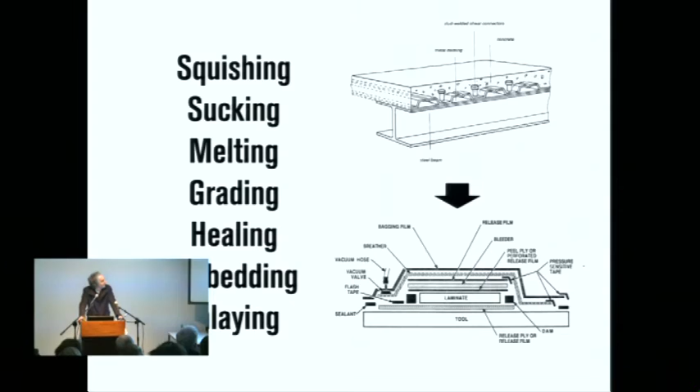Squishing is not a word you can use with steel and concrete. You can squish polymers, you can squish biomaterials and composites. So sucking, melting, grading, healing, embedding, inlaying.

I don't say architecture, by the way, because they're hardly ever used currently, and a lot of the composite construction we're talking about today, as I mentioned in the last review, is not state-of-the-art yet, but it's in the pipeline, and I think it will be in the next few years, at least in terms of building cladding and other issues.

That's a fact, and it's quite exciting to think about eliminating the concept of assembly altogether, where suddenly things are made with their component parts in a single pass, or maybe two passes, but very exciting stuff going on with multi-materiality right now.

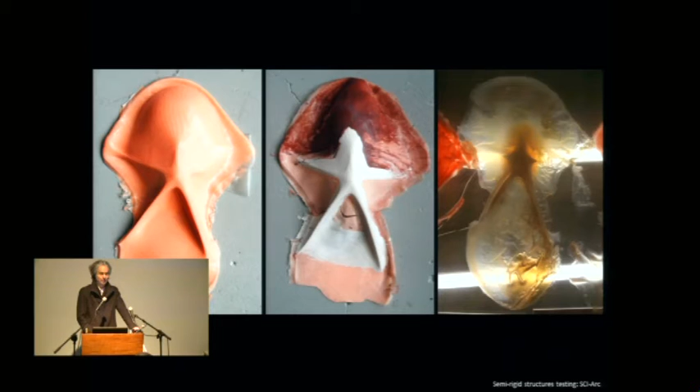This is another project from a seminar last semester at SCI-Arc. One of my students in my Squished Assemblies seminar, where we began to figure out what would it be like when we start to press and embed objects into surfaces in place of fixtures.

I'm really interested in eliminating all kinds of metallic hardware also. In fact, I have a kind of allergy against things that are metal and fixtures these days, so I'm trying to figure out how we can deal with composite construction, but also with all the other things that architects need to deal with, like lighting. In this case, this is a proposal for thin film solar, or other kinds of systems that might start to get embedded in an inlay, and then fused on top with a piece of acrylic that has its own kind of metaseam around it.

So this is Batwing, a project from many years ago, but I want to show a couple of these prototypes because I know you guys are working on this, and I'm not sure if you're familiar with them. This is from 5 years ago, and it was a first attempt to deal with surfaces beginning to delaminate. In this case, what happens when a surface can be not just a single surface, number one. Number two, what happens when it begins to delaminate?

You can start to get some structural rigidity, and also you get cavities. The surface starts to become volume, and you can use that volume in order to move air and fluids and things like that through an assembly.

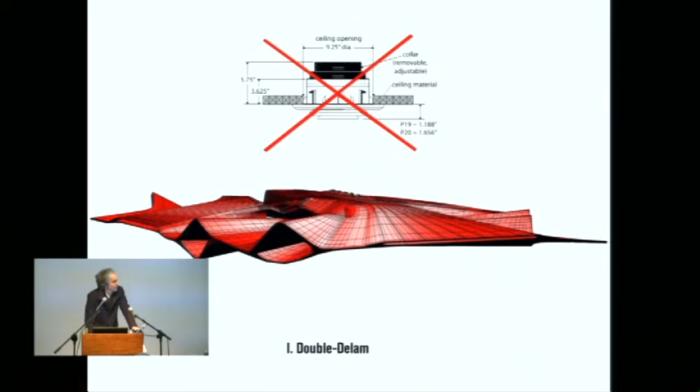So this is a kind of a prototype for a ceiling where you can get rid of the air diffuser, and basically, on the double delam, you can basically replace fan coil unit technology with a surface that does some work.

So you basically have some squished microcapillaries which are heating and cooling, so all you have to do is deliver air, and then these are filled with water, which is a great way to deliver heat and cool to rooms, and then you can run the air across it. So this is one of the earliest Squish projects, and here's a prototype of that.

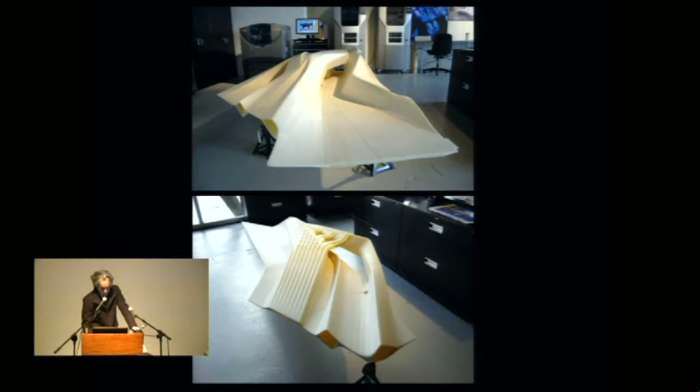You'll notice also, if I had my pointer, you'll notice some metaseams beginning to get formulated there, some seams on the prototype which don't actually have anything to do with components in that case, which are there purely at the architect's discretion. Another one, again, these are 4 years old now, but I thought it would be fun to show them.

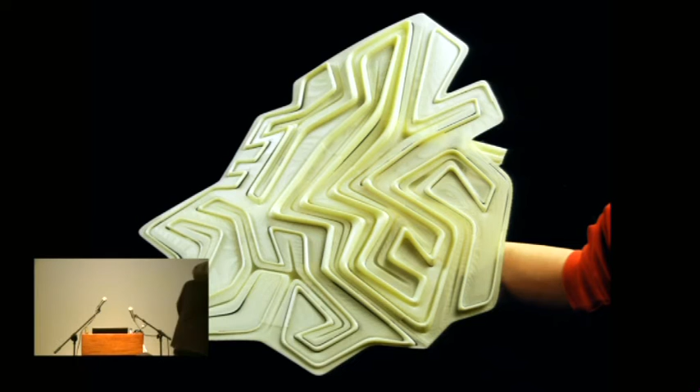One thing about that is that I'm not giving up on the idea that the structure can be maybe sideways to that, and that maybe the top chord is running the algae back to a central point, and the bottom chord is running the water, but that the structure may very well need to have a different kind of direction or language than the systems at the top.

Another one I'm really interested in, having dug it up, is called thermostrut. It deals with aperture, pleating, and most importantly, the embedment of a solar thermal system, like you'd find on a roof warming water for a swimming pool—those black coils.

So this is our version of that, where you begin to create figuration with these coils. I'd call this the earliest tattoo project from the office, where there's no functional reason the coils have to be all parallel, so it can become figural.

At the end of the day, I almost care more about the wholeness of this piece—through color, through the black line work, through the pleating, the unification of all these things—than I do about its engineering efficiency.

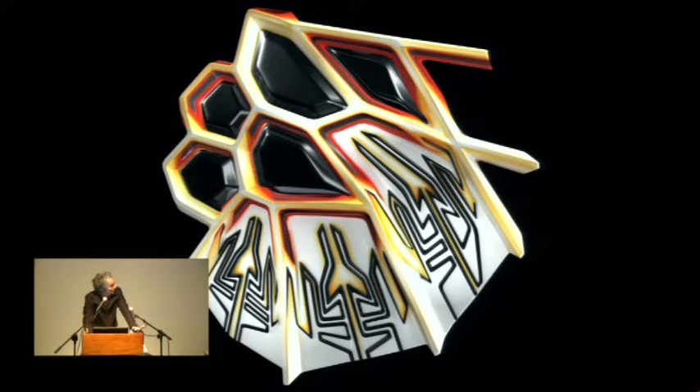So there's a model of it, things actually being pressed in. This is a multi-material print from a couple of years ago.

Another old project I showed for the concept of metaseams—notice these panels are way too big. This is a metal structure, and when this was done in 2008 there wasn't much discussion about composites yet, and I was even unsure myself. It was an intuitive move to break down these panels, create toroidal structural surfaces in the middle, and break them down in a radically different way, with very small panels and very large panels.

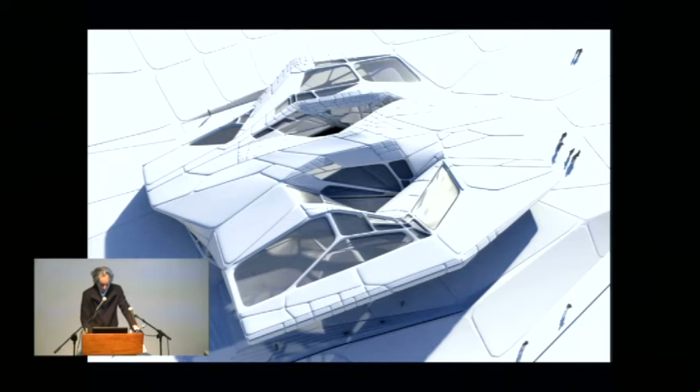Of course, when we imagine this through composite construction, those lines may or may not be joints, depending on how the project is delivered.

I want to show a project I did with my students, since I had discussions with Patrick about it recently. The program is called Materials Lab—we started it a few years ago at SCI-Arc. It involves the school supporting construction of an object using advanced materials, or whatever materials someone wants to use.

In this case we kicked it off with heterogeneous composite construction, which basically means, again, the surfboard idea—how composites can be more than a single layer over foam doing its business for performance and stiffening, and how you can have gradient differences in thickness to change the performance of composites.

So we decided to do this with tape, dyed orange tape. It was orange only because that was the only dye that would take to the glass fiber—I don't know why. It's shoe dye; we wanted black.

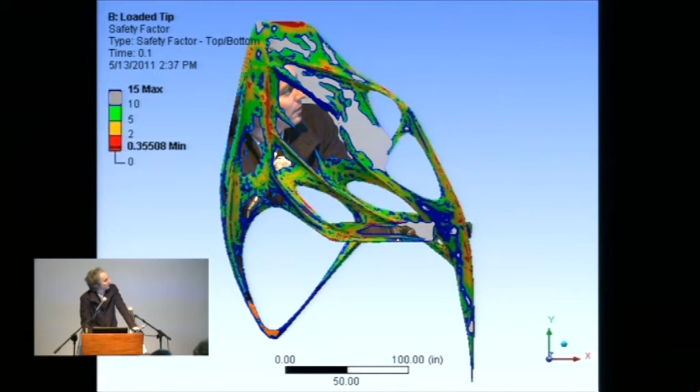So that was a quick study of it, a prototype. We worked with Buro Happold on this, doing surface structural analysis, which is still new to a lot of architectural engineers, as people in practice know.

We talk about surface structural analysis a lot in academia, but the reality is it's the aerospace and naval engineers who are really good at surface analysis, while architectural engineers are usually still stuck with vectors. So this was fun for Happold too, getting up to speed in ANSYS to analyze the structure for cantilever.

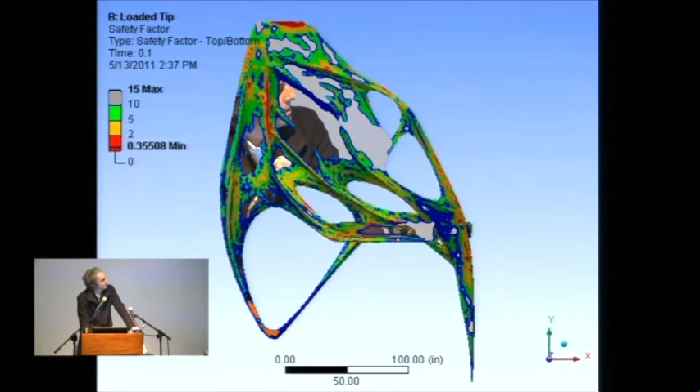We did a series of steps—I didn't want to show them all tonight—to get to the point where we could add the tape. The pleating was something that evolved over time, but we decided to use the tape to deal with some of the stress high points.

This is actually from an email I sent to Happold when we were starting to talk about how to apply the tape. I wanted it to be kind of patchy and discontinuous, not wrapping the entire thing. So this is the piece.

Wherever you see orange, imagine there are at least 2 layers of weave on the piece, up to 4 or 5. The overall thickness of the piece is very thin, like 1/16 of an inch, and it's just fiberglass mat. It's completely underdimensioned, so if you put this up without the orange tape, it would fail—which is exactly the concept. We need to add the tape locally wherever needed and build it up, particularly at the supports, so that it functions.

Now, I want to say this is probably not the most optimal solution, and that's something I'm a bit against—the expression of optimum and optimal engineering solutions. So any trained eye will look at this and see where it's not optimal and where other things are going on here.

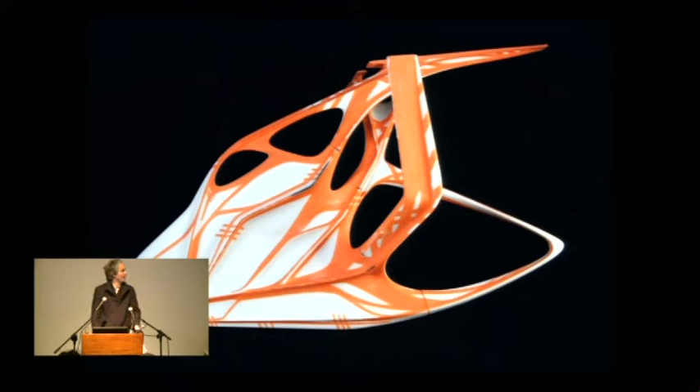At that moment is when I started calling it structural tattoos. Because what is a structural tattoo? It's an inexact term, and I like it very much. There are obviously things that are not structural, and I'm totally good with that.

There it is when you turn off the rest of the skin, the taping. I guess I missed some slides—what happened? Oh, that's out of place.

All right, whatever. So one of the things about composites that we saw today is how do you break it up? It's completely different, depending on whether you are building it in situ.

In this case, we built it in chunks. And how do you attach chunks together? We wanted, almost in a maniacal way, to have no hardware in this piece, only glue, which created a lot of problems. So we had to do the components.

Why? Because we had to get them through the doors of the school. It had nothing to do with delivery, but we had to get them through the doors because we were working with a contractor outside of the school.

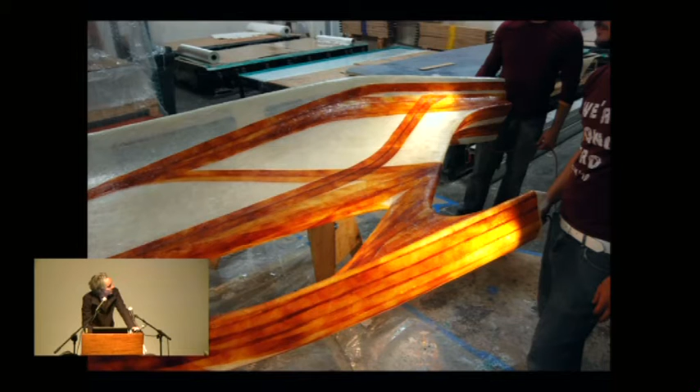So we built these things in pieces which already had the orange tape on them, which is interesting because there's not really much continuity between the pieces—which doesn't really matter in terms of composites. This isn't like a piece of rebar that has to stick out at the end and continue into the next piece of concrete. I thought that was very interesting.

I also like very much that we're looking again at structure which is translucent or transparent, which changes things. It's a game changer.

Here's us making some of the forms, and removing some of the molding, and then very low-tech again with projections, figuring out where we're going to put the tape on this thing in the factory using the 3D print we had and our black duct tape.

And then here's the piece standing in the space. It's connected back to the wall at a couple of points, and it cantilevers quite far out.

There's the final thing, and that's Andreas Froech from Machineous, who helped us build this project. It's quite resilient—it bobs up and down, but it doesn't really go anywhere.

Another thing I like about it that I didn't realize—we discovered after talking about it that if it fails, it doesn't crack or break, but folds like textile, like a stiffened jacket. So even if it fails, it's not going to really kill anybody. You'll see it coming, it'll fold down.

But anyway, we got a bunch of people up there. So that's that project.

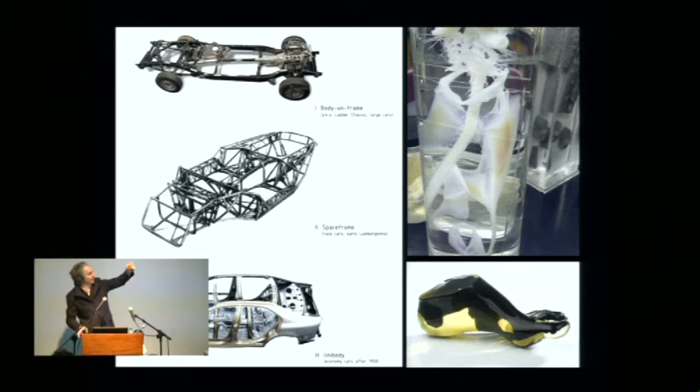And sharks also have these strange growths in there. The spine isn't so interesting, but those things on the side have increased material thickness related to increased opacity, and decreased material thickness related to decreased capacity and opacity. Very interesting in the shark skeleton. The implication there is also the multi-materiality of 3D printing, for which I find a car to be a really great scale.

That's right around the corner, that kind of stuff. So here's a sketch of what that might be when you begin to determine, when you begin to put one material inside of another. Imagine this is a kind of silicone matrix within which you have a more rigid material only in areas where it's needed. One of the nice things about working with all polymers instead of mineral materials is you can begin to pull up almost like slabs of skin. You can pull up or wrench or wrinkle the skin on the car, and you don't have hinges or anything like that — it's all one giant living hinge. So here's when you pull out some of the internal more rigid areas from the inside.

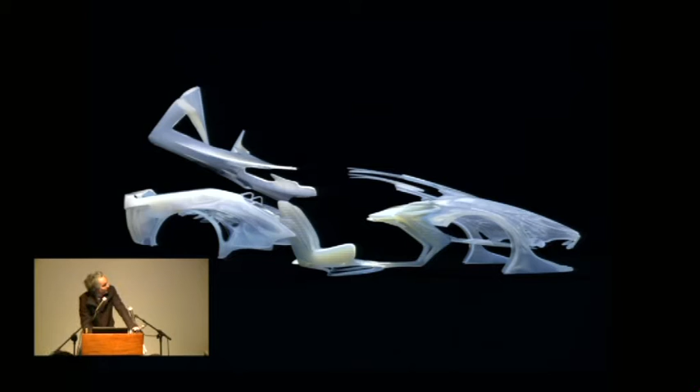And I love this idea of stuffing things inside of things, frankly, for the effect of being able to have depth in the surface. In this case, we're starting to think of ways of having biological glow, or maybe an algae bioreactor in the hood or whatever. So we're starting to stuff objects into this thing and then dip it all in silicone, more or less.

So you've got some actuators in there where we're kind of saying, how would we trigger the living hinge on this thing? Again, this is not an overall solution for a car by any means — I'm not an expert at drivetrains, but this is sort of an architect looking at the things an architect might be able to contribute on, which are issues of surface, enclosure, skin, embedding, aperture, those kinds of issues.

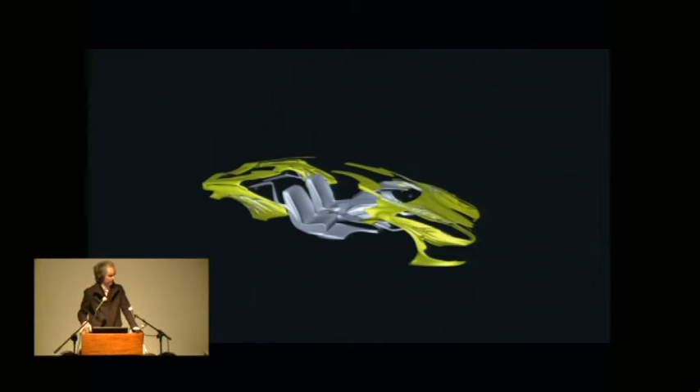One nice thing about 3D printing is, if you got a flat tire, you could just 3D print the entire thing out of more rigid rims and into rubber without having to have tires or anything like that. And one other thing too — this is just a concept, but it's interesting to think of how you might be able to roll up a car like a sleeping bag and pack it for transport from wherever it's manufactured, rather than having it in those strange containers down at port terminals.

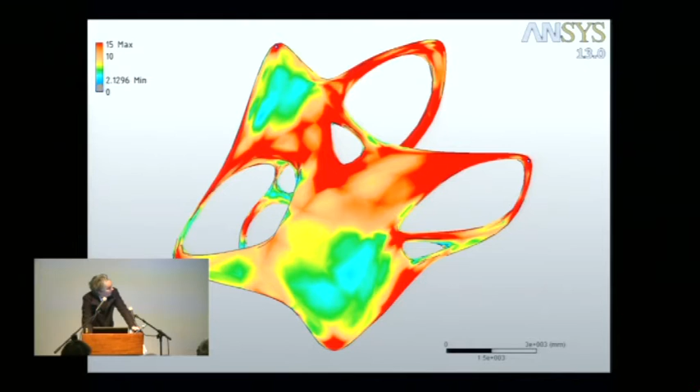We started this project, gave it a form, and analyzed it in ANSYS, and we decided that the areas under highest stress were going to need to stay as composite structure — so those are going to be fiberglass. The other areas were a little more open for discussion as to what they were going to be. We figured that the areas under least stress could become acrylic areas that are basically snap-in kinds of structures.

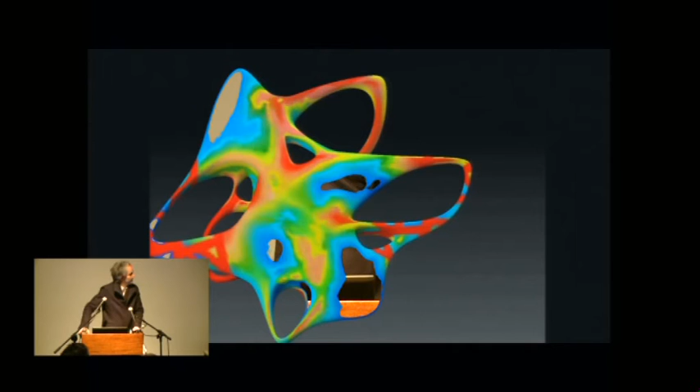Now, the project was really important for me and for the office because we began to misbehave a little bit with the engineering model here, where first of all, we brought it into ZBrush, which is probably a no-no, to take a structural map into a painting program. We began to look at it aesthetically and try to leave the areas that needed to be a certain way in terms of engineering, but then completely interrogate it in terms of the aesthetics and change it where we thought we could, because we wanted more loopiness, more leopardiness, and those kinds of qualities.

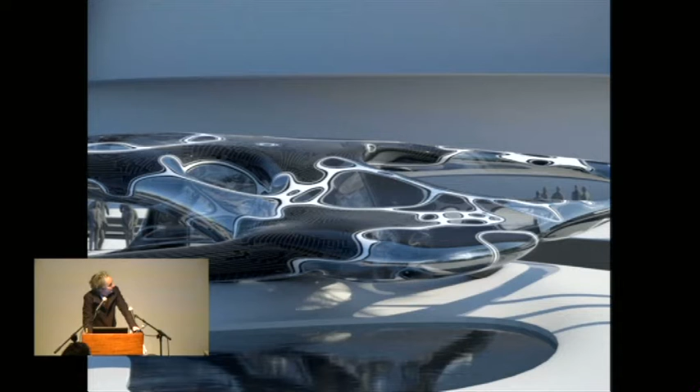So these are just some of the studies that we did on this piece. So there's the final thing. You can see some inlay of 3M thin film tape in the black areas. The white is just white on the outside. On the inside, it's electroluminescent on the acrylic.

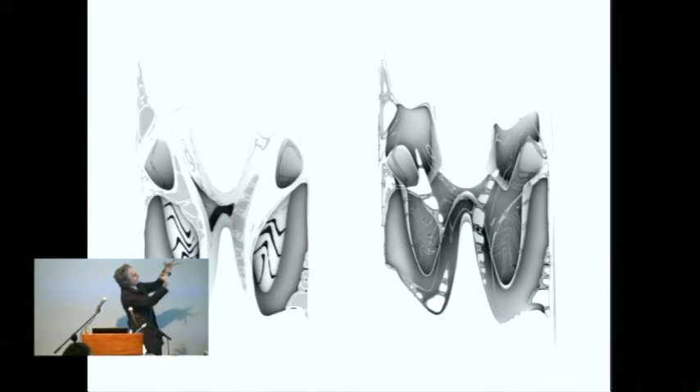Another prototype that we did after that, when I was just starting to get sick of things that are ultra thin—it's what happens when you begin to delaminate the surfaces again and create real objects inside of objects. So we took a two-surface piece, top surface, bottom surface, and then began to have huge involutions in the bottom surface so that we would actually have objects behind aquarium-type apertures.

And we began to really push the envelope of the paint so that we would have the black polka-dotted or spotted pattern on the outside as a solar inlay, and then on the inside we might have electroluminescent inlays which are more like tiger stripes. So we're going from cheetah to tiger here, and I like this piece just because it has volume to it. It's not super thin, but it's based on super thin tech.

So those are some of the prototypes and thinking, and the work over the years since I started my office, about six years ago now.

We used to do a lot of work on the issue of surface to line, which basically means teasing things out of surfaces—like taking a wire and teasing things out, particularly pleats out of surfaces, which was really productive and interesting. I think, though, that the work more recently has been more about surface to volume, which is the same basic idea, where you're trying to create transitions or transformations between things which are ultra flat and things which are more volumetric.

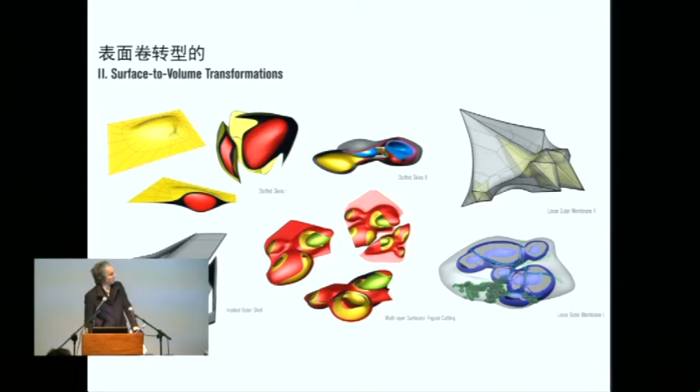And I'm finding that that's more useful in terms of building design and organization. The other one, the former, is maybe more useful in terms of articulation of surfaces. So surface to volume has been a big focus.

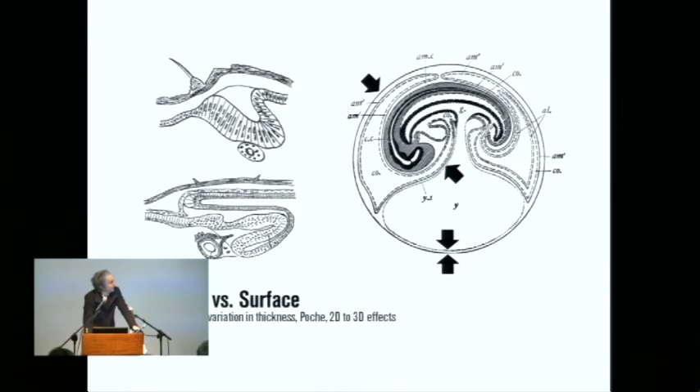I always like skin, the idea of skin over surface. Surface is very abstract to me, but skin I like very much because it's constantly changing in dimension and material, and I think it's a great model for thinking about architectural skins. So I like to think about that and objects inside of objects.

So that's the first one, push the wire through the rubber sheet. This is put the figure in the sack model—that's what I've been calling it.

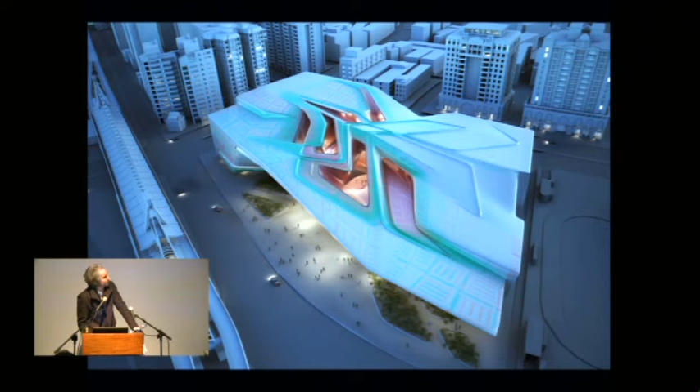I guess one of the important things about it was that it would go from razor thin on the edge to volumetric, and in this case, it also has cavities in the inside. The cavities are a kind of concourse space that connects several theaters together, and are really very urban. Again, it's beginning to break down the hard edge of the building and beginning to draw out the space between the building edge and the interior.

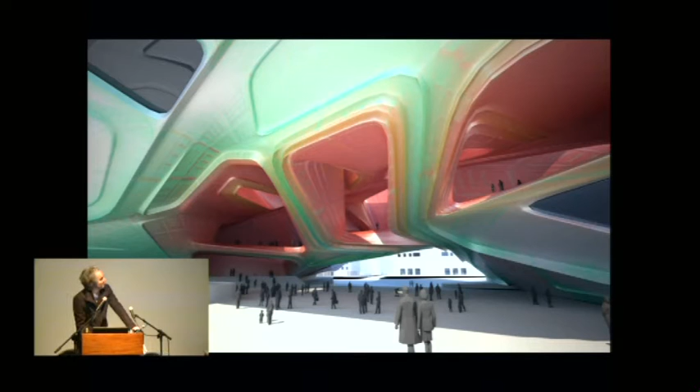This is a very highly articulated drawing out of that, where you begin to see pleats inferring some kind of stiffening of composite structure. You notice there are not conventional subdivisions on this on purpose. There is, however, if you look closely, some additional patterning on the left, almost Aztec-like, which is also one of the sources of the tattoos we've been working on recently, a substitute for conventional subdivision.

Project in Puerto Rico. Don't know what is going on with this, but this is something that my friends Hernan and Marcelo, the three of us, are working on to make happen in Puerto Rico, and we've made a lot of trips down there.

So this is a real project, and the proposal is from the Pontifical Catholic University of Puerto Rico to build dorms. They need 2,000 beds, so we're building some high-rises down there. Of course, I actually find high-rise design to be incredibly difficult, so I appreciate people who took that on today.

So I went with something horizontal, of course. That makes no sense, but I really like this model, which I call the implied outer shell, where you have an internal figure or mass which has surfaces that pull off of that and begin to create a secondary enclosure or implied outer enclosure, which is not total.

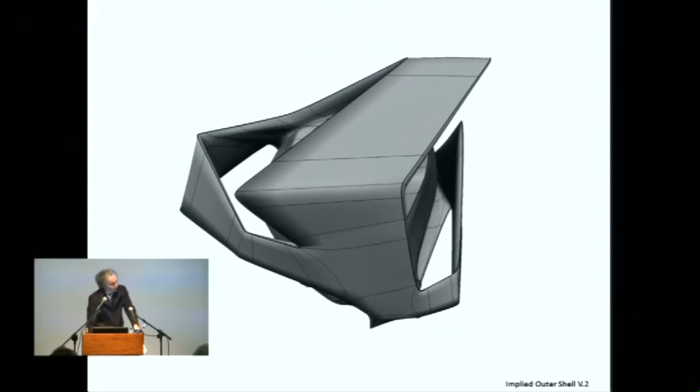And I wanted to use this to make the dorm. So here's the project. That was one angle. How do you begin to create something within something else in a tower type?

Almost impossible. The other thing I wanted to do was to separate the building from the ground, which is something I've also been doing intuitively for a few years, and I'm getting more excited about because it begins to objectify the piece where it's no longer a landscape project or a single surface project, but it's actually an object which is nestling into the ground.

Something I'm working on right now also is to begin to give the ground itself more character. But I like that very much, that it's kind of a no-no, like you don't do a horizontal organization for a vertical organization. You don't, let's say, burrow out underneath a tower, which should normally be a cantilevering beam out of the ground. But I think it has certain effects that work really well.

It also creates an interesting internal organization in one place where what you think is just a single surface on the left, this razor-sharp edge, actually opens up, delaminates, and there's space inside, so that becomes a shared public space that you can actually leap over on those bridges and inhabit that space and have a view out.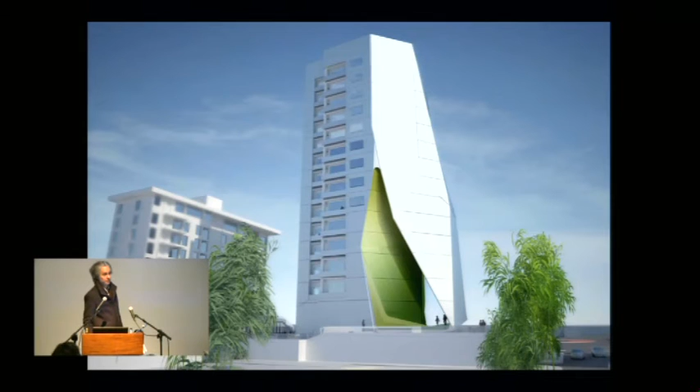So, and this is the back. This is rough and tough. This is a real project. If nothing else, if not for economy, this is for strategy, this image, if you know what I mean.

And this too. This is in Puerto Rico. This is where you build with concrete. Why hurricanes? Why longer-term history with building with concrete and a kind of feeling of comfort of building with concrete. So the red is the only steel area in the whole project, and those are just pipes. They're pretty straightforward.

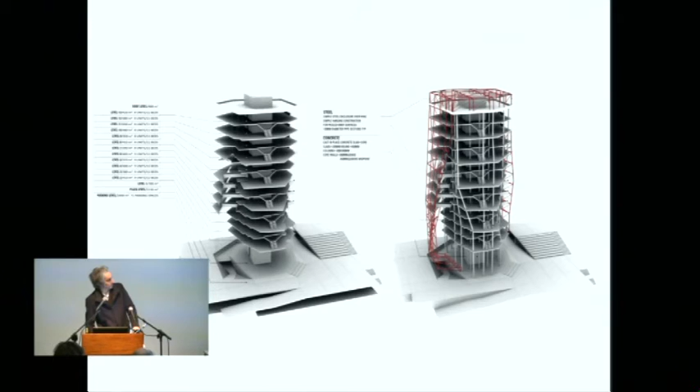So here's the piece. Punch windows, very difficult, hard call. I don't know how to solve it any better. There were probably 100 versions of how to do windows in a dorm, which you have to deal with. I found this to be the one that interrupted and hurt the massing the least. Surprisingly, there were a lot of other ones.

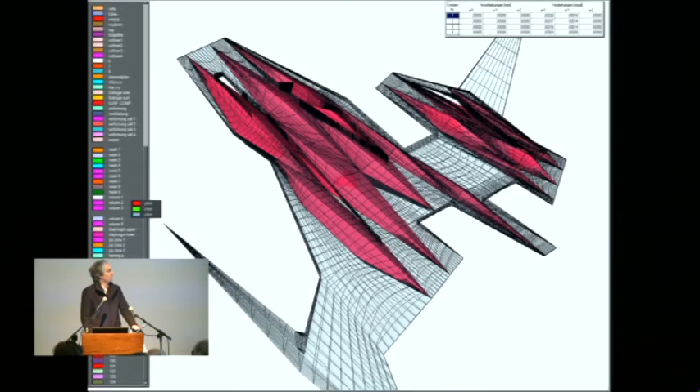Okay, older project, which you probably know. This is PS1, which is actually quite an old project now, 10 years old. But I brought it back because it is objects within objects. In this case, these are structural cells, which are kind of an arrangement or swarm of cells that are objects themselves, but have a loose outer skin around them to create shade. I'm realizing the more I think about it, this is a kind of early version of the squishing and also of the object within an object. So I wanted to show that.

So squished, as if vacuum formed, although made out of minerals, squished, and also the object, the structural members, not so interested in them structurally. Some of them are 50 feet long and they're doing a lot of work, but I'm way more interested in them as objects nested within a loose outer skin.

So here's the piece during the day, a complete opposite of the nested cell, which is quite nice too, so you read it as an object without its internal objects.

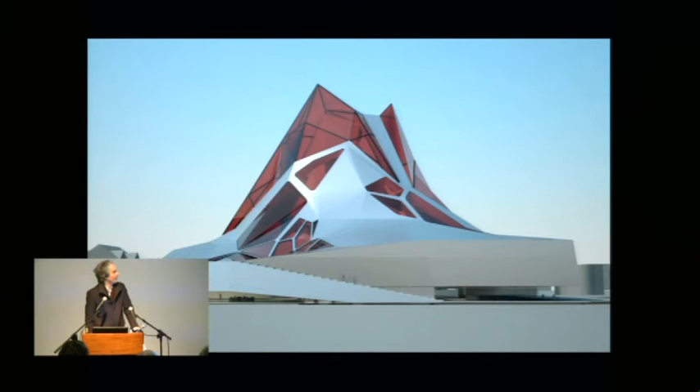So, another old one, brought it back. This is a competition that I did in '07 for the Prague National Library, and it's something that I'm finding, the more I think about it and begin to categorize some of my projects, is actually coming back. This is a National Archive and a library, and everyone knew about this competition at the time. It was won by Jan Kaplicky with a very similar scheme to this, actually, a kind of a mountain. One interesting thing about it is that the height limit was only 15 meters, which was this high. So it was one of those where you had to break the rules in order to make the final cut.

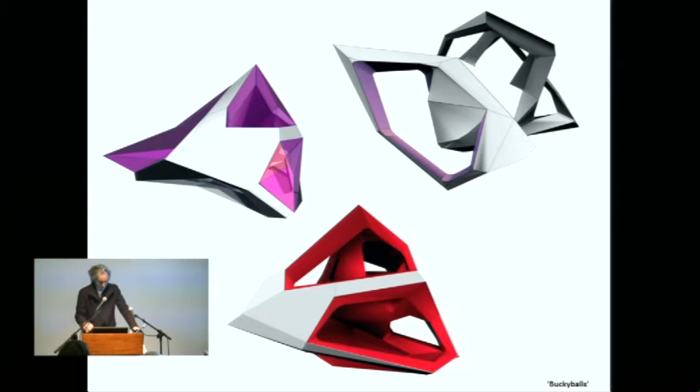And the reason why I'm showing it is because it's the beginning of what at the time I was calling these buckyballs. It was very informal, but the buckyball was basically an implied outer shell, where you have something on the inside and you have an outer shell which has huge apertures in it. And so I realized recently that that's actually part of this lineage of the Implied Outer Shell project.

So here you have the National Archive, accessible from almost nowhere, visible from everywhere, from the library at the bottom level, which is public, and then the reading rooms at the top, which are private, and then the thing is suspended above the ground. Again, you ask maybe why - they had flooding in Prague the years before that, they lost a huge part of their collection. It was actually required to have the books off the ground, so I thought I would make that the project.

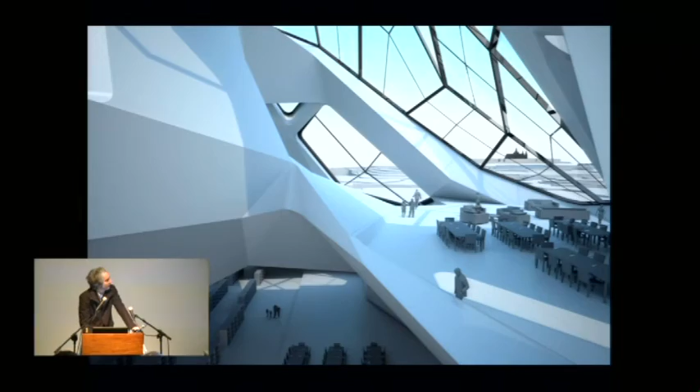And so there's a second skin around the entire thing, which creates a nice environmental and depth buffer around the object. So there's the organization of it, the view down onto the public space and out to the castle. And the plans.

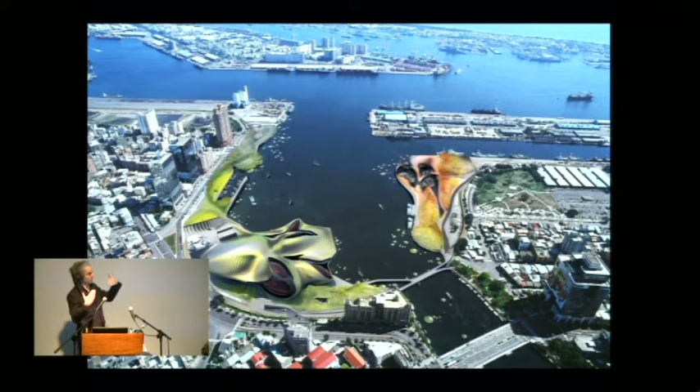So another older one, this is from 2010. Figures in a sack, objects in a sack. This is for the Kaohsiung pop music project, another big uninvited international competition. Really fun site, the entire waterfront of this old kind of port area of Kaohsiung. They wanted to turn it into a kind of multimedia music environment with indoor and outdoor amphitheater and those kinds of things. So I decided to make a multi-layer, multi-material sack, stuff it with theaters, and then begin to cut away at it with what we called glance cutting - basically complex surfaces that were not normal to the surface, but at angles, so that we begin to reveal the different layers and reveal the objects inside. So it would kind of hover between the mysterious quality of something in a sack and also revealing those objects inside. So there's this thing, some of the cutting and studies that we did, surface to volume, glance cutting.

And some patterning on there for thin film solar as well. You notice the patterning doesn't continue, it stops where you have the thin film. And here's the director's cut at the end - this is not the one we sent in, but this is the one everybody liked the most.

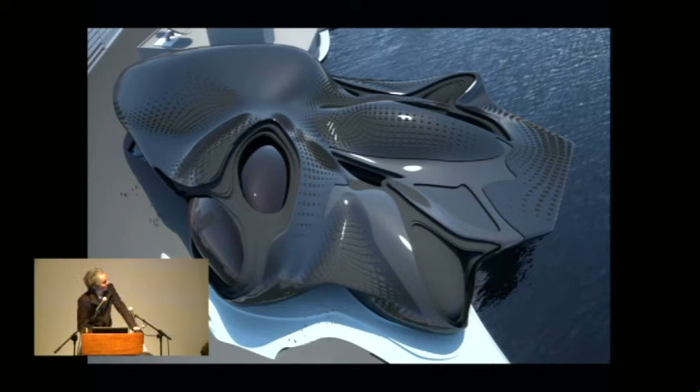Okay, so here's another project. This was actually for the Venice Biennale, so it wasn't really a competition. That's why it's not worked out.

But as a concept, we wanted to do it. This time, more mysteriousness, stranger figures, stronger edge figures inside of the sack, distinct fall-off conditions where you're beginning to understand what's inside, but then in other areas falling off into membrane. That was very important, and so we did some of these fun videos here.

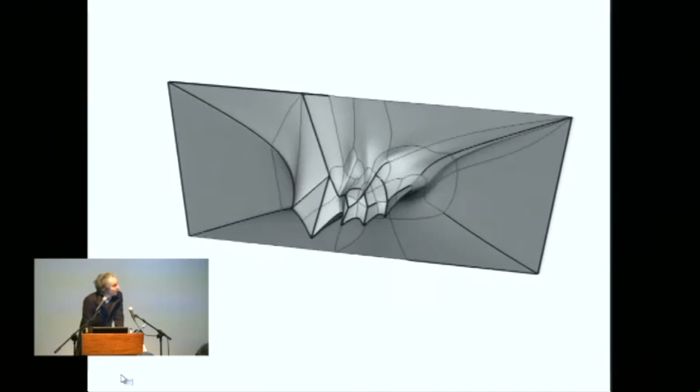Don't mistake this for a draping algorithm or an engineering solution, although it may have some of those qualities. The minute you stretch a membrane, of course, you've got a stronger and better performing membrane, but we love this little guy pushing through here. So, okay, let's keep going.

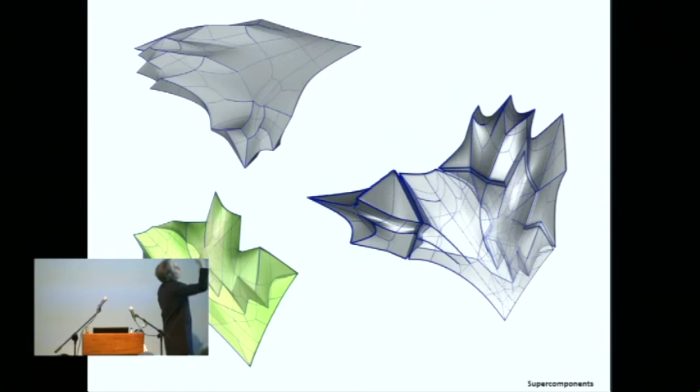So here's some of these figures in the sack. And then I think the more important thing on this project was that we wanted to get away from the uniform blobbiness of the thing on the top, although it's quite differentiated. We wanted to get away from that.

So we invented the idea of the supercomponent model. In this case, that meant putting a sack on there around the figures and then almost inflating a balloon inside, which we call the liner, which is the green thing. So you inflate it, you let it squish around and tuck in around the figures, and then you remove the outer sack as if it's a tool or a mold that you're using to get the liner.

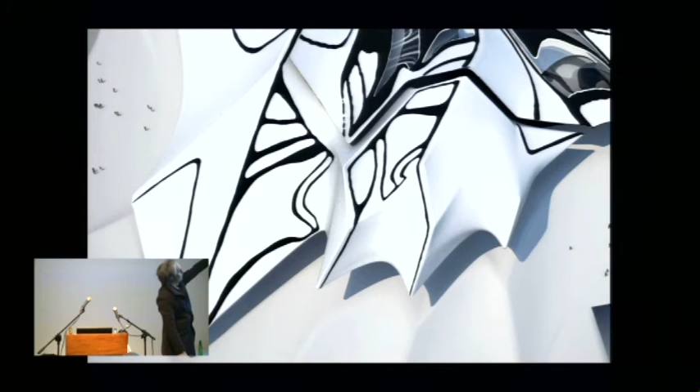What's the payoff of doing that? The payoff is that you can begin to get these joints. You get continuity between multiple massive components, which is then emphasized through the introduction of the tattoos, but they're separate objects. So you can imagine there's actually a space in between the supercomponents and the liner. So that was a nice discovery because we got away from just the uniform kind of topological thing there.

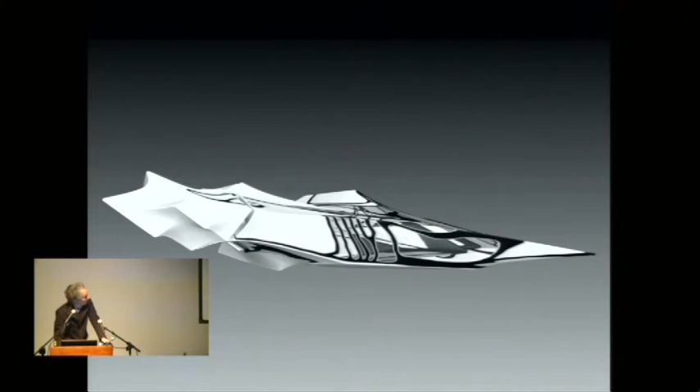So here's the side view. You can see the outer figures in some points actually pushing into and through, so you can see them through the front. So very undeveloped, but that's what we showed at the Biennale.

This project was for the Busan Opera House. I'm sure people in here did that one. That was a big one.

It was more recent. And in typical fashion, a kind of site that's not a site, a context that's not real—it's an artificial island, probably was a landfill. So we had one corner to work on, and we didn't know what the rest of the development was going to be. So we just thought we would kind of work on the spherical project there, and go vertical, but go spherical.

And again, we used the model of the implied outer shell. In this case, it was very useful because there's extreme weather here. The monsoons and the sun are very tough, it's very humid. So we really almost needed to create an in-between zone that they could use for some of the outdoor activities that they wanted to host, which would never have worked if we didn't do that.

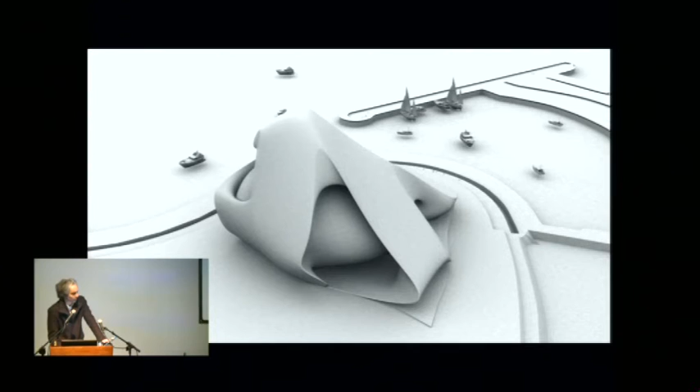So you see these kind of pieces of skin peeling off. So it creates an indoor-outdoor microclimate there.

The tattoos are maybe more aggressive in this project. We're just starting to come to terms with what these things are—I don't even know if we were calling them tattoos at the time. Where they're starting to have figuration, which is independent from the object. In other words, the drawing needs to be worked out in parallel to the object, to the massing. There isn't a complete one-to-one correspondence between formal features and the drawing features.

So there it is. Okay, so tattoos—I need to say something about those because you can't just say the word tattoo in an architectural lecture and not expand on that. So tattoos and the status of subdivisions.

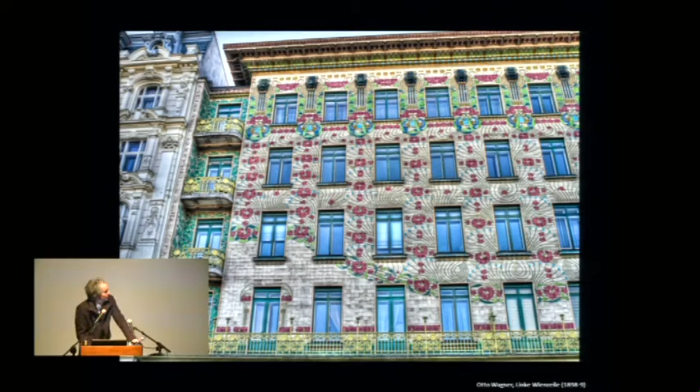I find that the window punch holes are very disturbing, and they don't seem to be affected at all by the tattoo layout. And also the size of the tiling relates to and indexes the kind of ceramic industry or concrete tile industry - I'm not really sure what the material is. So it's interesting as a kind of counterexample to what I'm talking about.

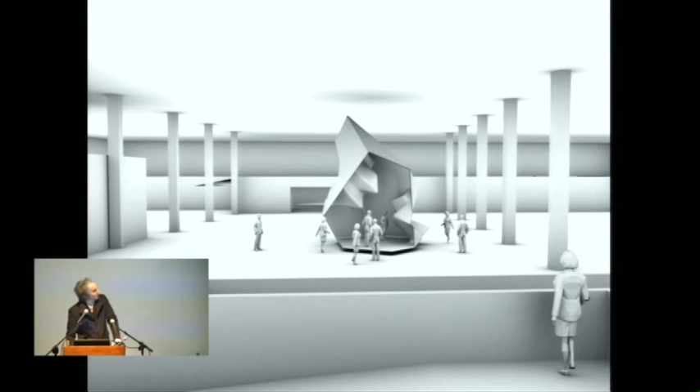But we decided to start with a crystal-like form and push some crystals in from the outside in order to create mass on the interior. So here's the base form of the piece, where you're getting something that appears to be incredibly massive or heavy, but it's actually razor-thin surface.

Here's the piece, very simple and crystalline on the outside, and on the inside kind of gooey and soft. And you can see there the poché is extremely razor thin on the edges and all the visible edges, so you read it as 2D thin surface, and then it becomes sort of lumpier and fatter in the internal areas.

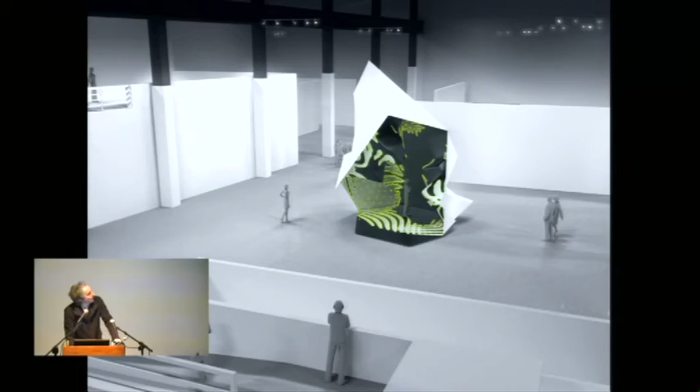So there are the tattoos relating to the moments of the most stretching pressure there in some fashion, but also going completely freestyle and freeform in other areas. So trying to highlight it, but also deviate from it.

This is one of the pattern studies for that, another one.

One of the interesting things about this piece is that it is actually composite, although it's one of those budgets where you kind of build it out of whatever you can get for the price. It ended up being composite because it makes the most sense.

And one part that I like about it very much is that what seemed to be excess or unrelated to underlying features or structure ended up being a way of friction fitting pieces together. So the tattoos themselves actually are reverse engineered back into joints where pieces begin to fit together with a limited amount of fasteners. So it's kind of stable almost just when you assemble it, like puzzle pieces.

And of course it had to be broken up to just be moved in a truck. This is a prefabricated piece.

This is a project for a graduation pavilion for SciArc, which was an internal competition that we did last summer. Again, this idea of pushing on something to get fall off conditions.

And here's the piece. The program was to build 1,200 seats that are in shade, for basically lectures and symposia and all kinds of things.

Patrick, I think you lectured there when it was a big empty pyramid with no cladding on it. And so the school wants to have something a little more permanent. So this is the project. I wanted to make a full enclosure on it that could be used for other functions.

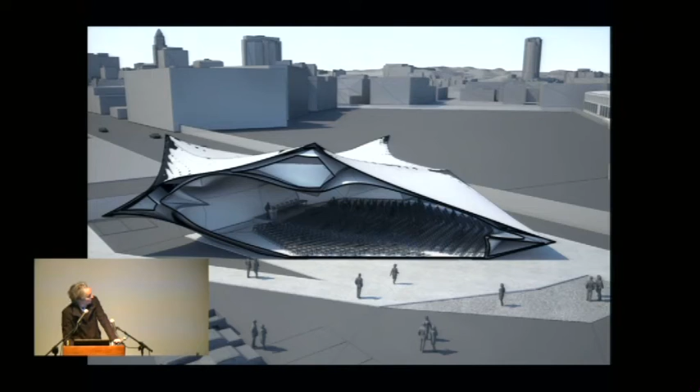But I guess the most important thing for a project like this, which was a realization project for almost no money, was the way of building it. So we called up some shrink wrapping people, because I thought that would be consequent, materially speaking, to try to use shrink wrap on a shrink wrap project.

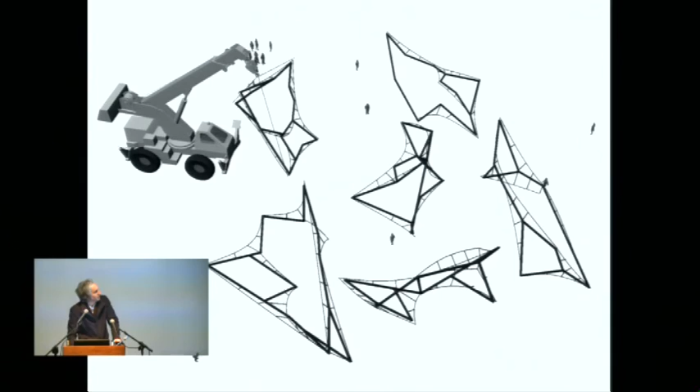I was searching around, and I called up this guy in Arizona who shrink wraps helicopters and all kinds of military equipment. We talked about it, and it turns out it's viable. One of the really important things was that we couldn't figure out how to shrink wrap the outside of it and then the inside of it, because it's shrinking and pulling off. So how do you do the inside and the outside? We scratched our heads for about a month, and then we figured it out.

We have to do super components. So we hacked the thing up into big pieces that could be shrink wrapped as objects, huge chunks of construction built as steel frames, and importantly, without any secondary construction—only temporary nylon strapping to hold the material before you shrink it. You remove it, and then you assemble these chunks in a single day with a crane. That made it feasible for the budget.

So there it is. This is a house project in Lugano with an amazing view, and it's really, frankly, all about the view, I have to say. This is an amazing property—an artist owner, a musician, with a big family, who's had this property for a couple of years.

We've been in contact, and it's a great piece of property. He's living right now in a loft that he built himself, and we were basically asked to mimic the area that he had in the house now, in the new house—that was the program brief. Oh yeah, and the view, of course.

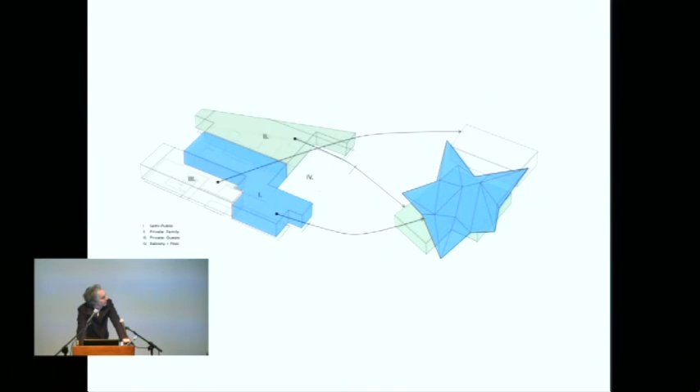So we took on those things, and I wanted to try to separate what looked like kind of a slab building into clear objects with separation from one another. We started with a very strong figure, which would become the main public living space, connected back into the hillside with secondary support spaces like guest bedrooms and a studio, and then putting the whole thing on top of a pedestal, which keeps it up in the air and off the ground.

So the aperture became the main feature of this chunky form. At the time, I'd just looked at some Frank Lloyd Wright with some of my students—I wanted to look at the textile block houses for the angle on tattoos, which I find interesting. I noticed how Frank Lloyd Wright was dissolving away an aperture by adding a bunch of micro apertures around it, and I thought that was really interesting. So the wrestling mask is doing the same thing in a different way—starting to dissolve the edge of the aperture through a secondary figure around it.

So that became the idea for making a giant window to look at the view from this house. We began again with a drawing, which in this case was an unfold. The black lines are the edges that became two massive apertures, and the red lines are the seam lines between the composite construction. Wherever there's a fold line, that's an edge, and the red lines tend to be 90 degrees to that—in composite construction, you don't want to run a seam along a corner if you can help it. You want to run counter to that to maintain the strength of the seam.

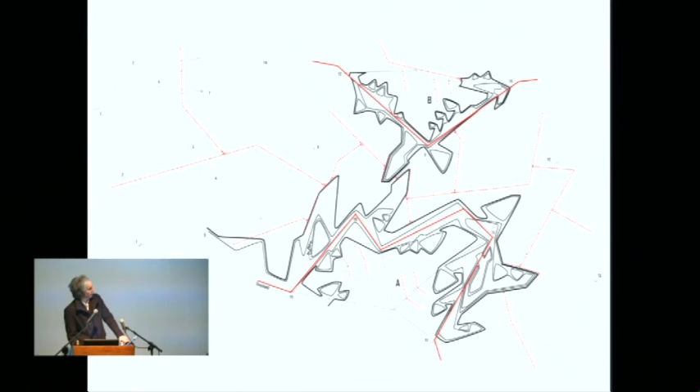So you get this kind of wild drawing, which is both a definition of the aperture and also a breakdown of the components. Here's the piece, beginning to almost atomize the window—both define it and atomize it into sub-windows through the tattoo, which, you'll notice, isn't everywhere. It's intense in two main areas where the windows are, and then it disappears. In addition, you have some dashed lines, which are an index of this drawing, which I like very much, and which can be built just like that.

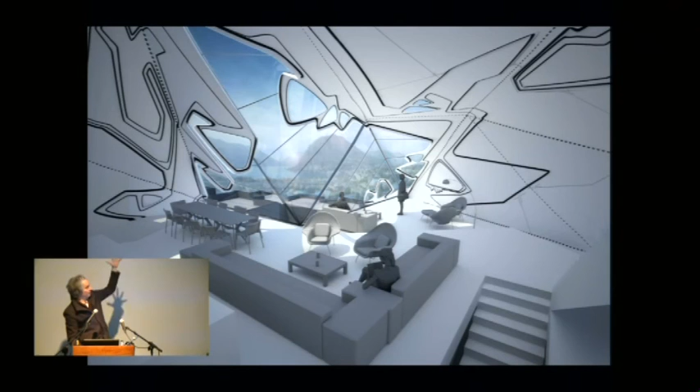So there it is on the inside. On the inside, you have channels embedded about an inch in, so it becomes an embedded drawing on the interior. The plan is very straightforward on the pedestal level, and the living area is basically an open kitchen, dining room, and living area.

The composite construction here is puzzle pieced together, originally intended to be just composite with foam in between. So imagine fiberglass on the inside and outside for stiffness, and then foam on the inside for insulation.

However, it turned out that because they're musicians, it needs to be incredibly quiet in there, and you don't get a lot of mass for building acoustics. So one way to get around that was to get the mass through GFRC panels on the inside and outside, but that seemed not cost effective. So we actually ended up going with a steel frame with a steel deck, concrete on that, and composite for the skin. That's the tough reality of where we are right now with composites, but really interesting learning experience.

I hadn't even thought of that angle. So here's the final piece. I want to show- Theo, how much time do I have? I got good, okay, I'll go really quickly.

I just wanted to show some larger projects and a couple of the issues involved in those, really quick. I've done a lot of work in China over the last couple of years, and it's good to show because the scale is so different than some of these other projects, and it requires a different strategy in a lot of cases. I like to say some of the work I do is runway, and some of it is pret-a-porter, ready to wear.

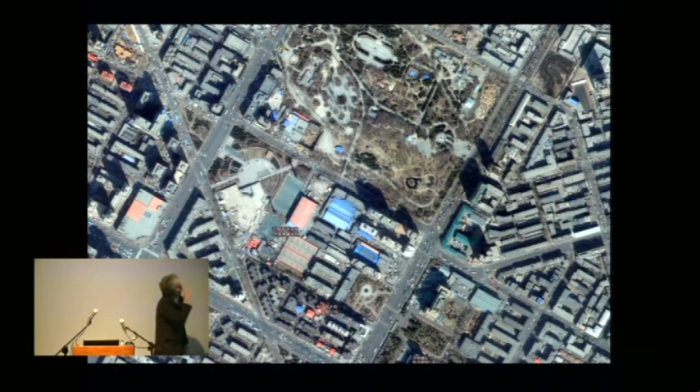This is a different project though - a competition that I won in Shenyang, China, for a sports complex. It's this entire block here, right in the middle of Shenyang, next to this park. For some reason I got into a lot of sports projects there, and actually they're pretty easy, I have to say - like, go do sports. It's good, a lot of volume, not that hard to figure out.

This is a project we did for the Taekwondo arena for the Chinese National Games. It's not going to be built - we thought for a long time that it would be, but we did get first place in the competition. It's quite large - you can't tell by looking at just the object, which actually is large, but the entire block is all our work. It's basically built like a parking garage, many levels, with all the sports fields planned by the office. These are just the key arenas to be used during the national games, then cleaned out to create a giant civic center at the end. We planned it with wood floors and all of that, so you could clear out the national games stuff - they got burned in the Olympics in China, they never wanted to do that again. So everything's multifunctional now. It's 1.2 million square feet, quite large - a lot of that is in the parking garage, which of course makes that thing possible.

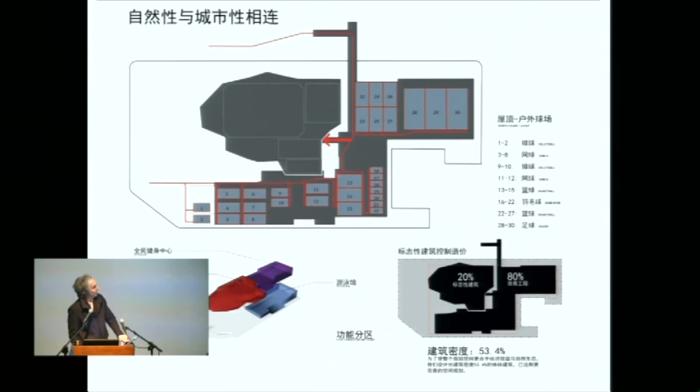The strategy I use a lot is what I call the 2080, or the 1090, or even the 595, depending. In this case, 20% means 20% architecture, 80% parking garage - only way to do these projects, the budgets are low and getting lower. So here you see the layout, very, very straightforward, supporting stuff.

It happens all the time that you lose control of what the structure is. It could switch from concrete to steel. In this case, we just couldn't find somebody willing to do the engineering of the composites. It wasn't even that we couldn't find someone to build it, it's that nobody wanted to engineer it. So that was off the table right off the top, and we had to develop a vector structure instead.

At the end of the day, if you can, as a first step into this language I'm interested in, simulate it on your first try and then do it for real the next one, I would have been happy enough, I have to say.

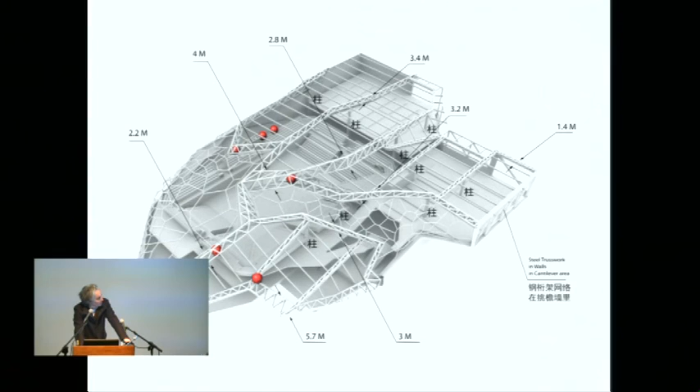Patchiness on the big giant windows, one of which looks out into the park. Some are semi-opaque, semi-transparent in order to have some more hierarchy there.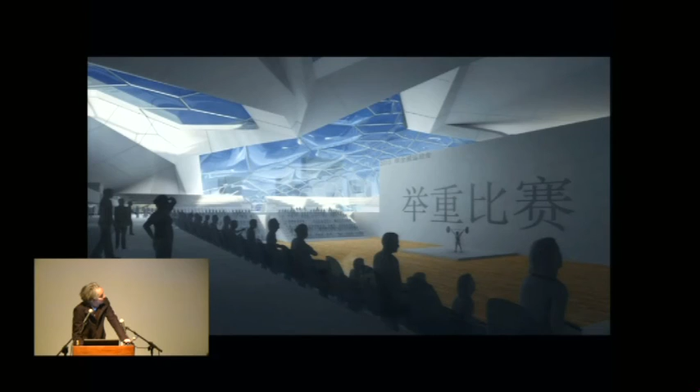This is one of the many, many models we made in China, milled out of a solid block of plexiglass, and interior. I'll show you this video.

You'll like this. For those of you who do competitions in China, you may know this whole thing where you're not allowed to present, but you have to make a movie in Chinese that runs for 10 minutes, and you're not allowed to say anything. I'll show you just a little clip of that movie because I think it's... I don't know, gotta have it.

This was made on Christmas Eve, when the competition organizers decided that the 24th was a bad day and that we should wait until the 30th and have more time, so I spent Christmas in Shenyang. Anyway, it's too bad that didn't happen.

That was exciting, that project. It was right in the middle of the city. So let me show quickly two more projects. I'll go even faster, I promise.

This is a hotel right next to Beijing Airport, from Foster, in the 5th ring of Beijing, where they're starting to develop now. They've really filled up the rest of the rings.

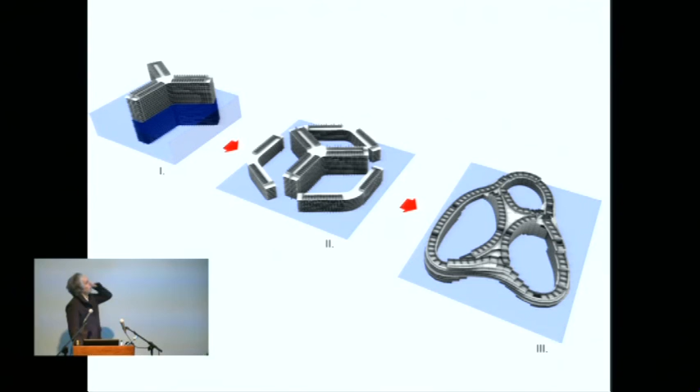A hotel is difficult when the optimal shape is like a Las Vegas hotel on the left, but because of the airplane restrictions at 45 meters, you have to actually chop that up and put the pieces down on the ground and do a horizontal hotel. So that's what we did.

We took 3 rings. This, by the way, is the project that was done in 24 hours. So 3 rings connected together, which have some rooms with views to the interior and some to the exterior. Why are some looking to the interior? Because the client wanted a 10,000 square meter rainforest inside the building, so he wanted some jungle rooms and then some city rooms.

Also very important, of course, is that airplanes are flying over this thing all the time, so you need to be able to see in through the top. This was part of the brief, which was a paragraph long: you have to look in through the top and see the rainforest as you fly over it.

So here's what I would call the machine inside of the loose outer skin, the sac, which is loose. The outer skin is not the weather enclosure, it's a loose skin. And the rooms are all—luckily we had a script to run these a bunch of times.

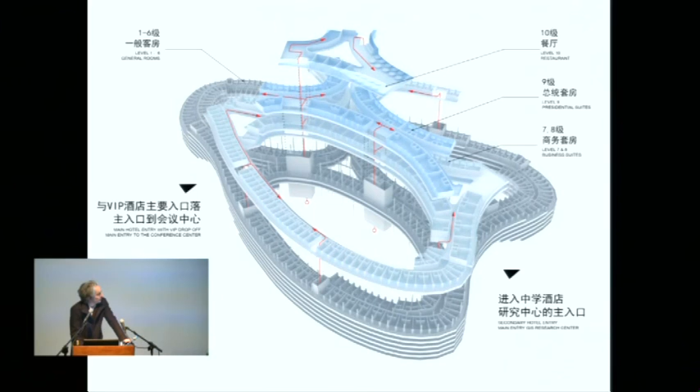But we had 1,500 rooms, which made this thing the biggest hotel in Beijing. I had to run them and rerun them. You have a lot of parameters, and that's very difficult because you're dealing with an 8 by 8 meter concrete column grid, and then the complex geometry overlaid on that. So that was a kind of fun little puzzle to figure out.

Another part of the brief was that it had to be white. We didn't know why, really—it seemed to be just the preference of the client, so it was white.

We decided to sneak some color in by saying that the inside of the shell can be colorful. They said, well, why? And they said, well, by the way, this is China—you have to have a metaphor, or we don't understand it. They literally told me that, and I was like, okay, I can do that. I get it—bird's nest, water cube.

So we decided it's the white dragon, and that the inside is the phoenix. The white dragon being a sign of power, and there are 5 dragons and all of that stuff. So white dragon, and then phoenix on the inside, which is the yin-yang opposite—more feminine, whatever, on the inside—and that seemed to make sense for a while.

Actually, what happened was that we continued with that metaphor for a while until we got up the food chain, and then we were with the Interior Minister of China, who then told me that he turned white, literally, when I said it was the white dragon. Maybe it was a bad translation, I don't know what it was, but he looked at me in horror and said white is the color of death in China. It can't be the white dragon. And I was like, what? Come on! Everyone else had advised me the white dragon was good.

So here's one of the entry areas. You can kind of see some of the yellowish color coming through there, a kind of garden-like thing between the outer skin and the inner skin. Starting to see a dual pattern, which becomes important in a minute.

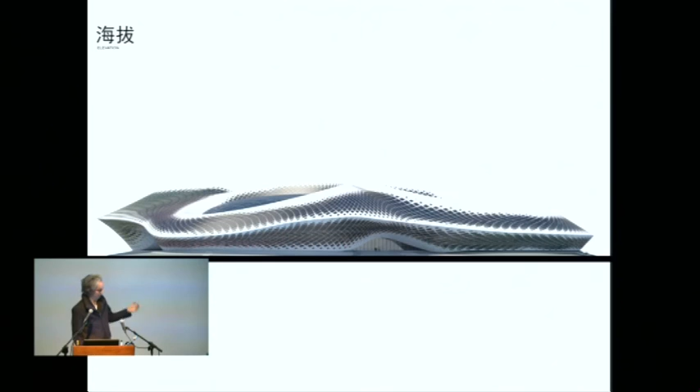So here's that thing—it's 300 meters long, pretty huge, kind of squished from both sides. And there's the scale of it. You can begin to see the dual patterning there, because obviously you need to have a ton of openings. So it's like, how do you shred a mass as much as you possibly can without destroying the mass?

It's a difficult problem, and at the same time we wanted to add a secondary patterning there, which became really important for the project. At first it was aesthetic, and then we figured out we needed to deal with what you deal with in a hotel: water.

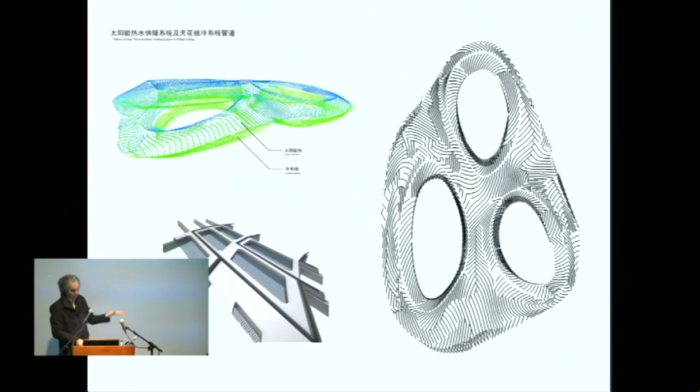Hot water needs are huge in a hotel, so we made a thermal heating system with pipes embedded, sticking out a little bit above the panel, so you begin to read it as tattoos on the roof, and then on the underbelly there are cooling pipes, because this thing is seriously picking up a lot of heat in the summer. So it's all cold water and cool air descending on your head.

So yeah, I just have to show this. Again, this is that event where it was—and you gotta love it.

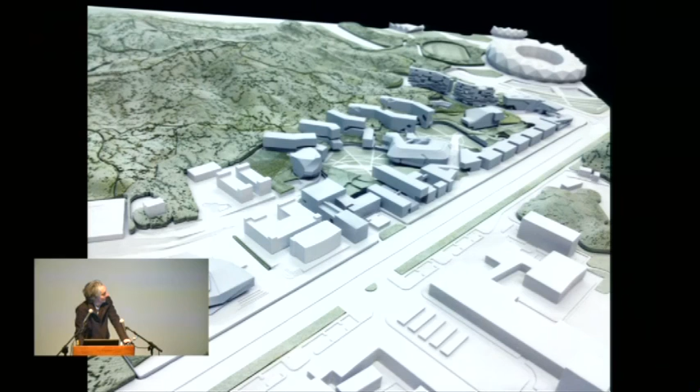Last project, sorry to keep you guys, I know it's long, but this is recent and I want to show it. This is important to me because Thom Mayne from Morphosis invited me and four other people to do a joint design team, a pitch for a project in China—the Hong Kong University China campus, in Shenzhen.

There's a big movement right now of Hong Kong and other universities moving into the mainland. And so we knew this was a go. This is a big project—a whole university from the ground up. This is only phase one, in fact, of this competition.

So we pitched. Thom led the team: Mack Scogin, Neil Denari, John Enright, Brendan MacFarlane, and my office. This is after the master planning was done, then we all took some buildings and had only a few weeks to do it. I, of course, did sports, on the far left, lower left.

This is my project. Neil is up there, the two sort of chunky boxes. Thom's in the middle with the library. Mack did the labs and some dorms, and then John Enright did the admin building and the dorms in the back.

So this is us working at Thom's office. It was really fun because we actually installed ourselves there. We all brought people over and worked on his mezzanine together and had a lot of feedback. It was quite fun.

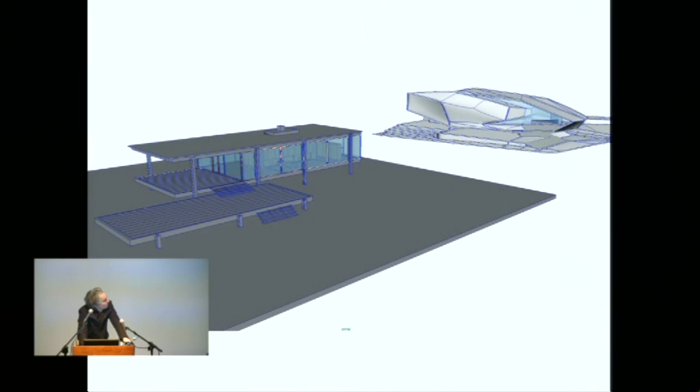And I enjoyed that, so that's this project. Again, pulling skins off of this is the arena that I was working on, although there were other programs. There's all kinds of sports annexes and gyms, basically the entire sports program for the university, which I decided to put together in a big mega structure.

This is starting off with what is the arena, how can we begin to peel skin off of this and create some interstitial space, or some kind of procession into this thing.

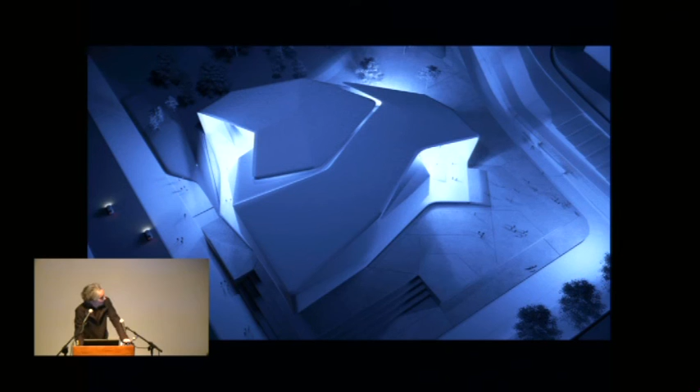Starting to also realize there's a phasing requirement in the brief where the thing has to be done in two chunks, so we can't have it be a big topological form, which I was done with anyway. So it was really nice to have a huge joint down the middle, make it appear as one whole, but actually be two different mega components.

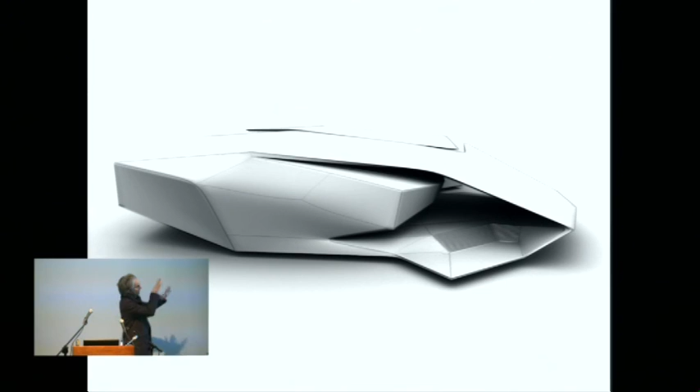And then deal with this idea of an object which is starting to unravel, or unfurl, and create a shell which is implied, a secondary skin, but doesn't go all the way around, because economically that doesn't work. But also I think this is interesting in terms of drawing people up inside of it, and then into the arena.

So there's the second phase. Would have been tough if they didn't build the second phase, but was okay. We worked on it in such a way that we could have lived with it even without the second phase.

We're right along a promenade, so how do you go through there? And the tattoo on this project, we decided to go extremely bold and tough.

We had a meeting with Arup, and they informed us that there are new extremely tight energy restrictions, tighter than in Germany now and southern China, and that we had to have a ton of solar on the roofs. I was the only one up for it out of most of the architects, so I took it all, and we made this really fat, tough tattoo for the roof to take care of those requirements.

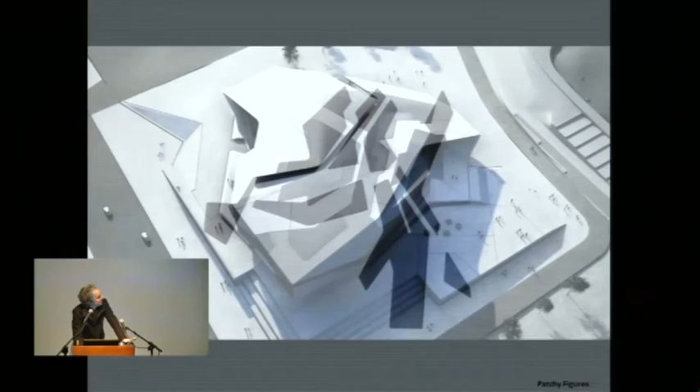So there you have the tattoo. Again, trying to run along some of the edges and enhance them. In other places, running completely across the form, like a no-no in a way. And then mega seams running around the objects, kind of tying it all together.

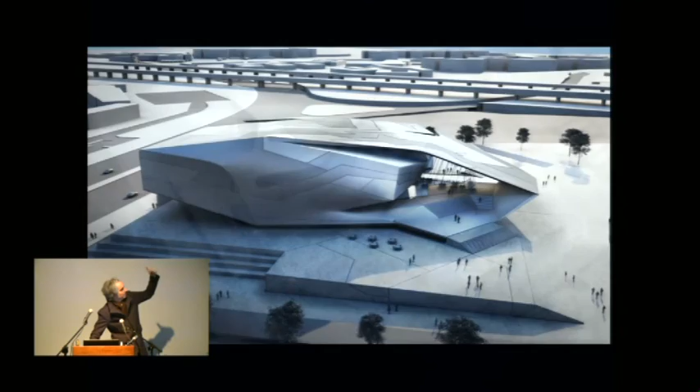But again, there aren't actual minor material divisions, but sort of mega divisions.

So here's the piece, the layout of the sports arenas. And then this is a secondary enclosure within the outdoor space. So you come up on the plinth, you begin to enter the building, then you go up the stair, and then you're on a sub-level, and you enter again this glass piece, which is shoved inside of what is outdoor space. So you're kind of in these gradients of gray spaces, and then you're actually in the space.

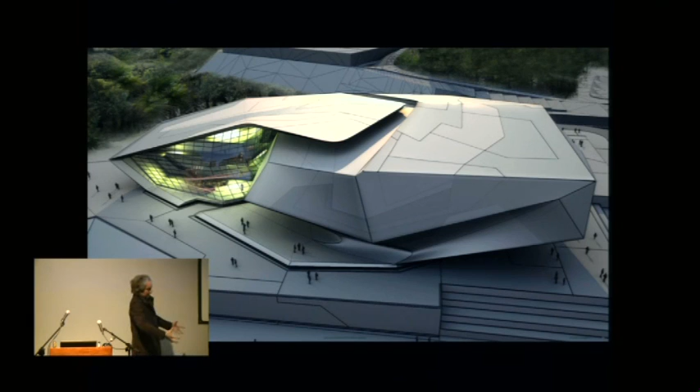Very important too, and the last thing I'll say is this building is on the ground, but it's off the ground. The channel running along the edge is incredibly important, that it's resting in the ground, it's not merging with the ground. This is not a landscape project, it is definitively an object that's lifted, or at least visually faked to look lifted off of the ground, so that it has a tension with the kind of plinth it's on, and that it's more object than it is landscape.

Thank you very much.